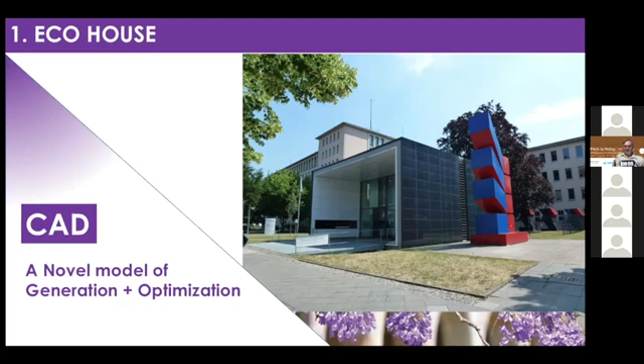However, the interesting thing is we have built a house in the past already that showed energy use could be reduced so much. In fact, our neighbors did not believe that my meters were accurate, and we had to get the utility back in to replace the meter and validate that in my house energy consumption indeed was 10% of the neighbors. And I'm telling you this because we know India has an enormous challenge in building new houses, but the great news is that we can do it in an energy efficient way.

This is the house you see here in this slide I talked about. We have built it, and we have 10% of the energy use of the neighbors. And the house is not more expensive, it is just much better designed. So, the great opportunity is not to go business as usual and get millions of houses built. Let's build them smart, and we can save an enormous amount of energy. We did some calculations with the virtual model: 39% of energy can be saved, and we can reduce 32% of the carbon emission.

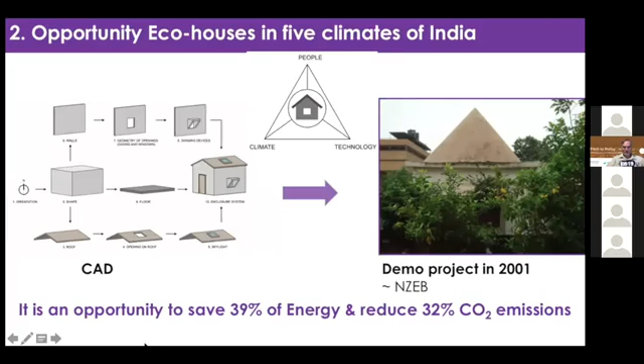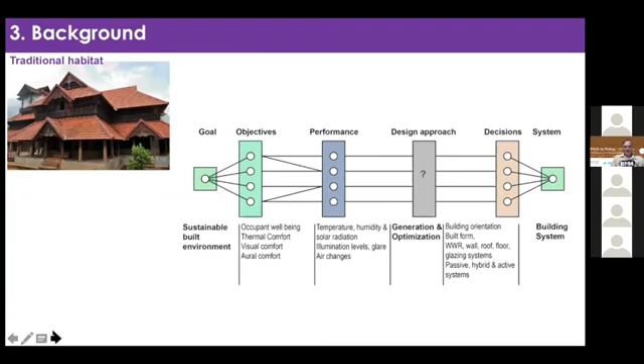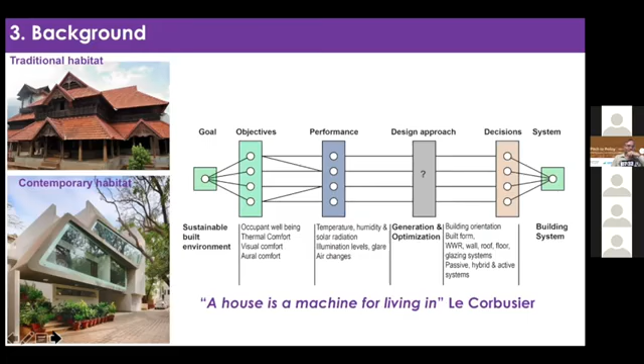Your question would be, how would we do this? What we have done in our integrated CAD model is use all the insights that we always had, because in the past we built traditional houses, very energy efficient, in which climate was acceptable, temperatures were comfortable, energy use was low, ventilation was optimal. Somehow along the way, in this trend of urbanization, we have forgotten how to do that. But it is possible. Our great great parents built in a more intelligent way. In our new CAD software model, we have integrated all these insights. So it becomes easy to design houses that on the one hand fulfill modern standards of living, and on the other hand save energy.

You might ask, why are we not doing this if it is so simple? It is not so simple. Our current models of designing new houses are based on the status quo. We have different stakeholders, and they have different roles, and they are using different software. Builders use their own spreadsheets to do calculations. Civil servants are used to seeing their conventional sort of design. They know what they get and it is easy for them to understand. The whole stakeholder system is built around one way of designing, approving, and permitting houses. That's why we are there.

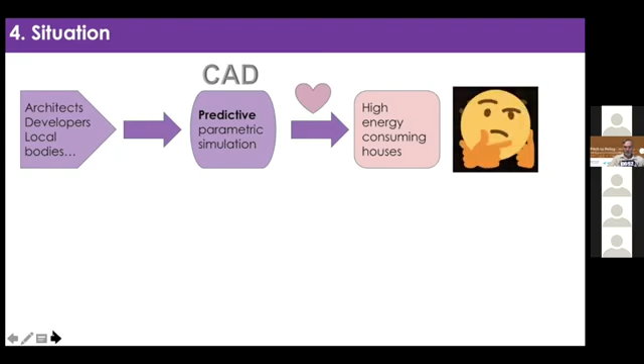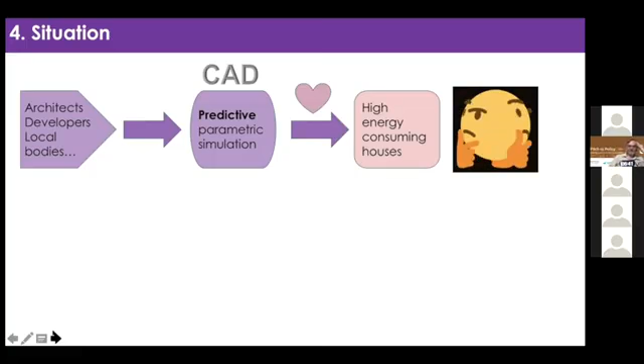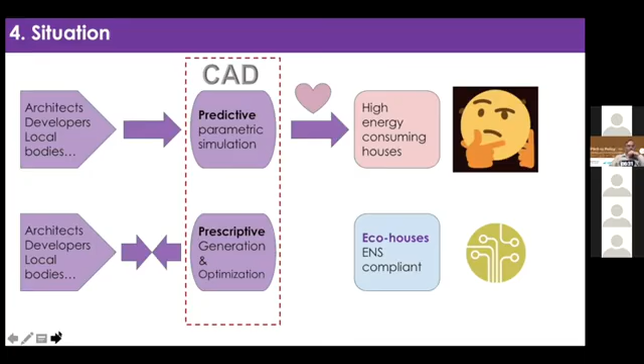And there is no easy way for the builder. Construction companies and architects are not able to design low footprint houses using the current software. And that is where we have to intervene. The current models of software are based on trial and error, and we are caught in a loop. So we have developed and transformed traditional CAD models with environmental factors and new building energy efficiency insights. So architects have an easy job now to design these houses, high apartments that can integrate all ENS compliant elements. That's the change. Designing ENS compliant houses becomes as easy as designing houses the old fashioned way. We have developed that kind of CAD model.

It has climate data files for 64 cities in India. It has an extensive library of building materials for walls and roofs available in India, and it is diametrically opposite to conventional simulation models. The closest analogy I can give is driverless cars. We are in that era, so I am proposing this CAD model, which will be very simple for architects and developers to use and design houses.

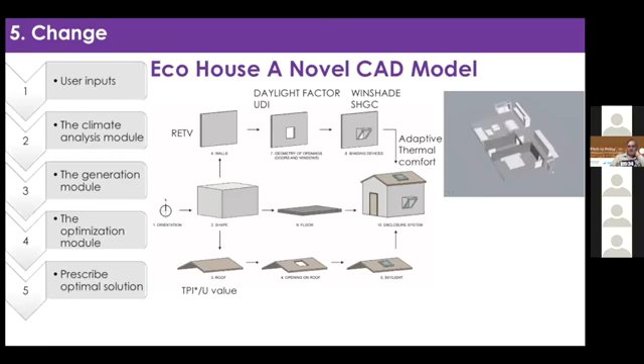And this is what we are asking. We have this web tool. We are transforming this CAD model into a web tool, and we are looking for collaborators to use this CAD model and show its benefit. We have already collaborated with our university, and we have got a piece of land where we can have a prototype built using this model. And the outcome will be that, as a number of PMAY urban houses have to come, we can save a significant amount of energy and CO2 emissions in the future.